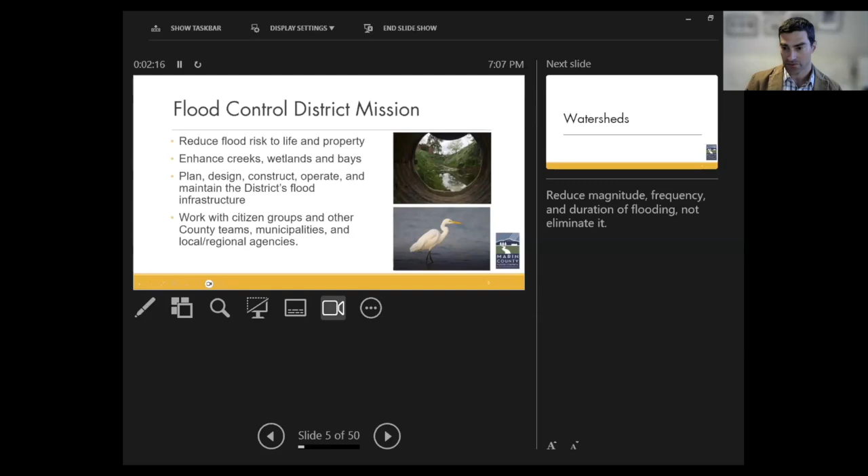In terms of watersheds in Southern Marin, there are 6 primary watersheds. Let me use the laser pointer here.

So we have Marin City watershed, Coyote Creek, Arroyo Corte Madera del Presidio, Ryan Creek, the Sutton Manor, Alto Strawberry watershed, and Bel Air.

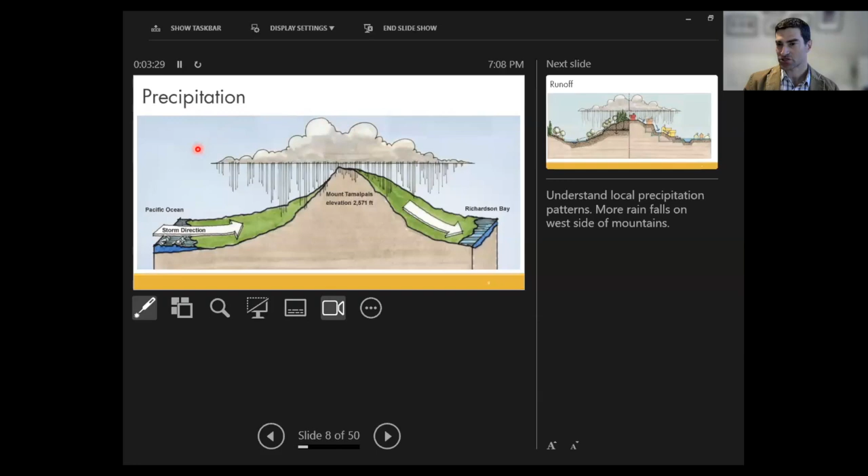So that's the terrain. In terms of precipitation, a lot of the rainfall patterns come to us from the Pacific Ocean. There's more rain that falls on the west side of Marin. It gets blocked by Mount Tamalpais, so there's less rainfall on the side that we're talking about today along Richardson Bay.

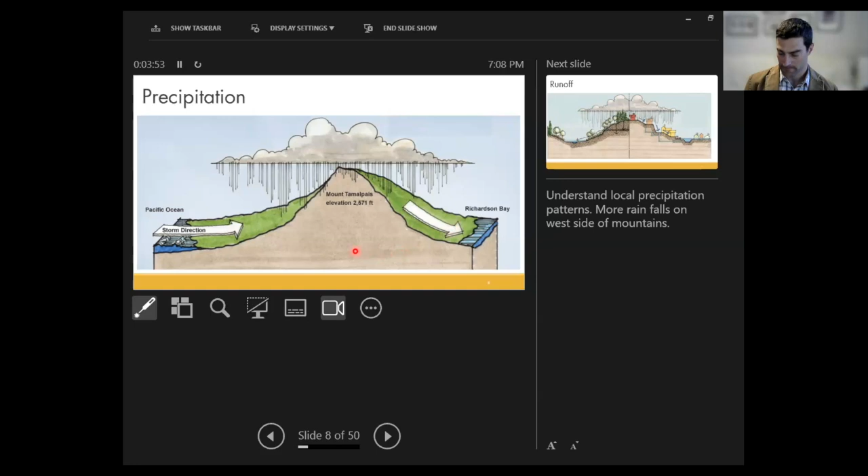The amount of runoff that goes to our storm drains and creek systems is increased or exacerbated when we add imperviousness — urbanization, rooftops, roadways, pavement. That water does not necessarily seep in or get collected, but runs off in higher magnitude and more frequently.

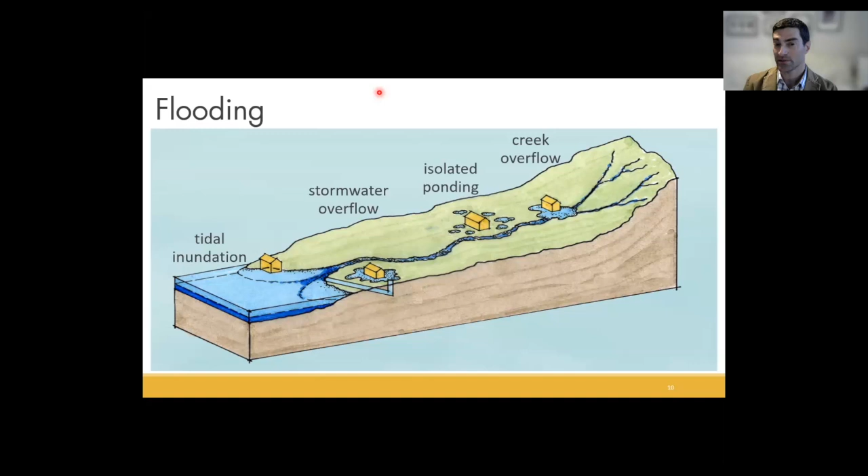In terms of flooding, there are different mechanisms. We have creek overflow, which is where creeks spill over the banks, shown here. We have isolated ponding, which is when pools form without positive drainage. Stormwater overflow is when storm drains back up, due to conveyance deficiencies or condition deficiencies.

Conveyance deficiency is when the pipe is just not large enough to convey the flow occurring during the storm. Condition deficiency is when the pipe is actually clogged with debris or sediment, and that can cause an overflow as well.

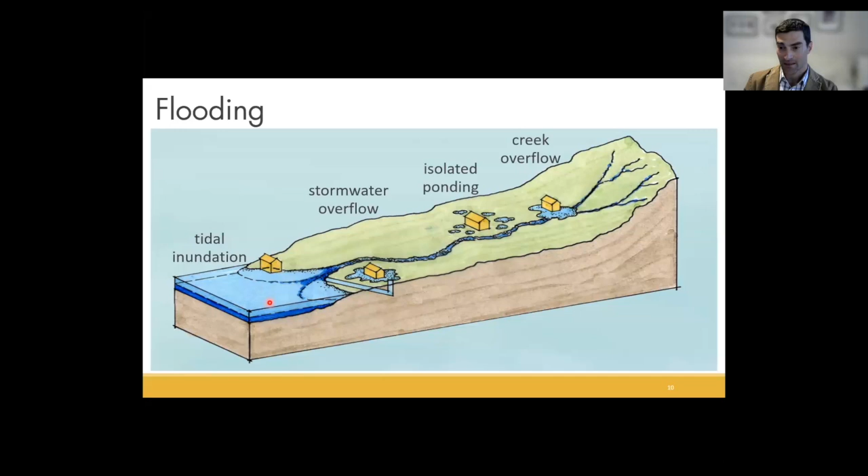Then also tidal inundation with rising tides can flood lowland areas. This is a big issue along the bay margins where there's development on top of young bay mud, which is fairly compressible. So in certain parts of Marin, we see inches to feet of differential settlement that has occurred over time, and when you're near the bay, that can really affect flooding.

So it is a challenge to address that, but there are things we can do, as Judd has said, and Andrew and Brian will tell you. There are things we can do to reduce the amount of flooding and the duration that it lasts.

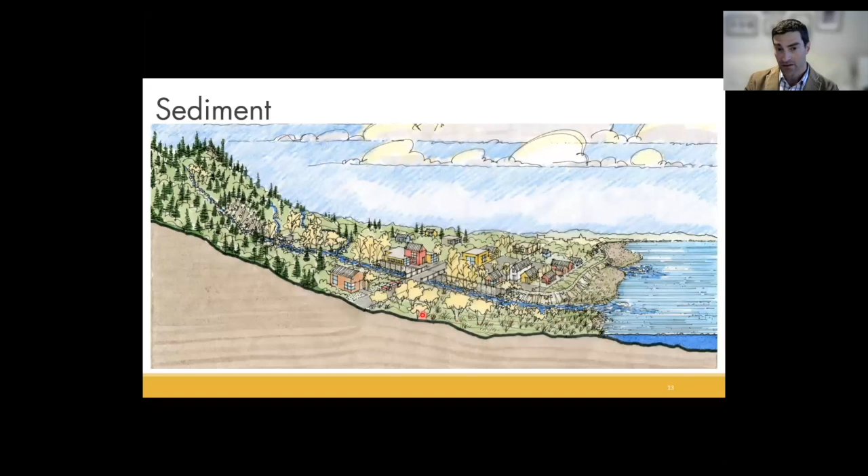As a geomorphologist, I think not only about water flow, but sediment as well. This is an artistic rendering of what I call a longitudinal profile of a creek, showing different zones of sediment. There's sediment production in the steep hillsides, where erosion supplies the creek with quite a bit of sediment. Then there's the zone of transport.

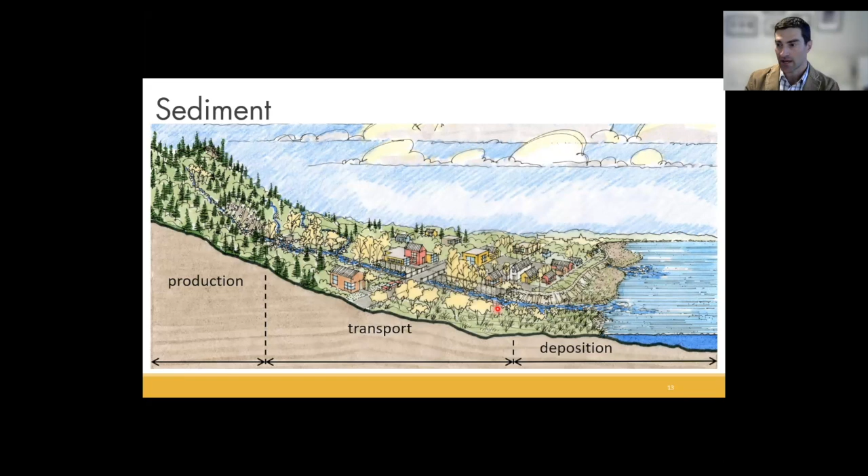That's where in our creeks, many of them are conveying that sediment supplied from above and along bank erosion, down through the system until we get to more of a depositional area. Those tend to be on the flats along the bay. Sediment deposition is an issue when it affects the ability to control for flooding. If there's enough sediment buildup, there could be a need to dredge or excavate that sediment.

So you may be asking yourself how you might be able to help. One is inspecting and clearing your driveway, culvert, and drainage is very important. I don't know if many of you know that pavement damage, soil erosion, and mudslides can actually be caused by blocked stormwater flow across driveways or under driveways through culverts. If leaves or other waste block the flow of stormwater runoff, the water gets redirected and can cause serious flooding or other localized erosion.

Those issues can lead to road closures and need for repair projects, and those repair projects cost money, paid for in many cases by county tax dollars. So you can help prevent such damage and costs to the public by doing simple things, including inspecting and clearing your drainages, reducing debris, and placing green waste in the compost. Do your part before the rain. The best time to do some cleaning is late summer, early fall, right before the wet season starts.

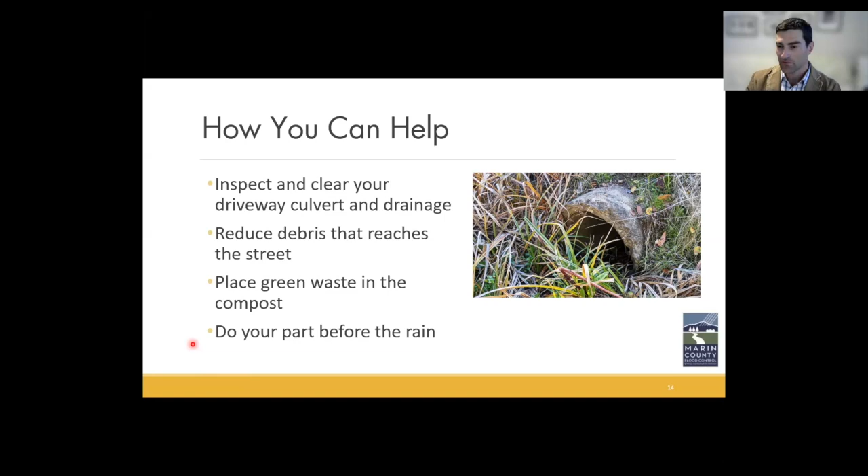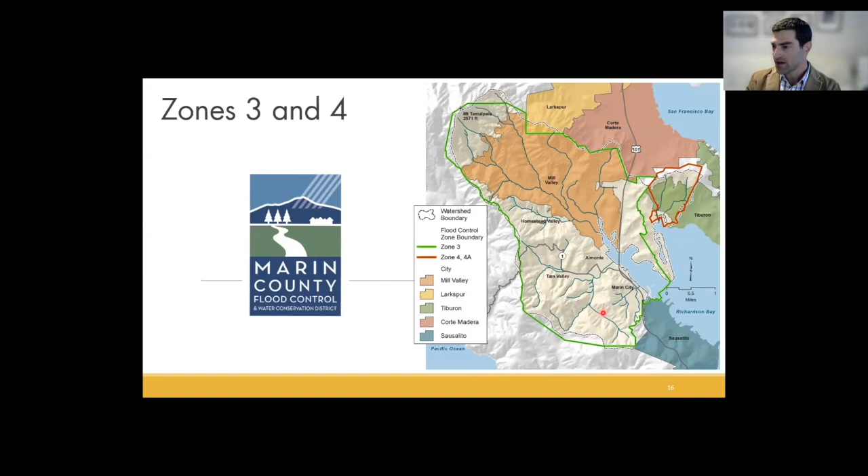Next, I'm going to talk about flood zones, how the flood district is organized in Southern Marin. You can see that we have flood zone 3, including Mill Valley, Tamalpais Valley, Marin City, and then we also have zone 4 in Tiburon.

Our different types of projects include maintenance projects, capital improvements, as well as planning studies. This is one example of a sediment debris basin in the Coyote Creek watershed, and it's an example of where this project had to be planned. It was in a planning document to begin with, so that's a study. Then it was built, and when it's built, that's a capital improvement. Following that, there's regular maintenance.

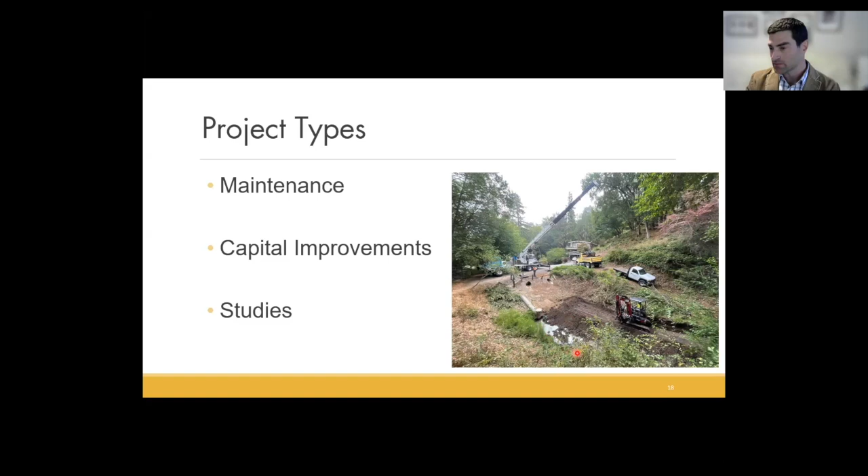This is a picture of some contractors cleaning out sediment that was built up in the debris basin. For maintenance, this gives you a little bit of the areas that the flood district concentrates on. We have a number of pump stations, 8 pump stations in zone 3 and 4, and we also have creeks and levees that we maintain. These are the names of the different pump stations.

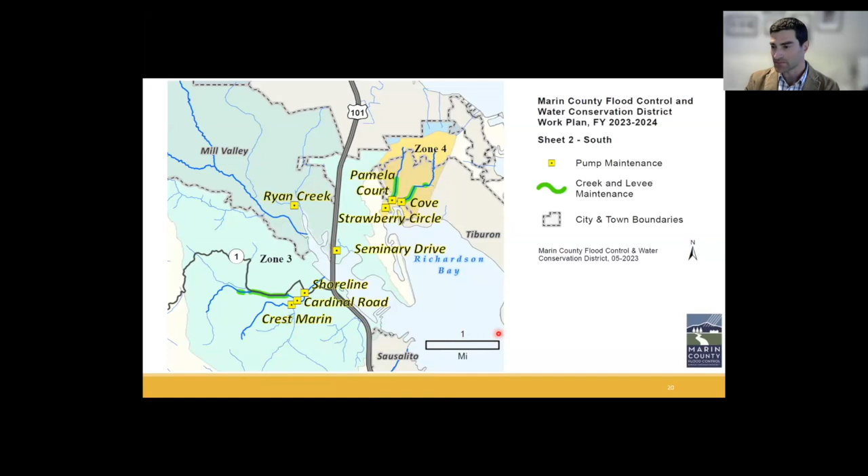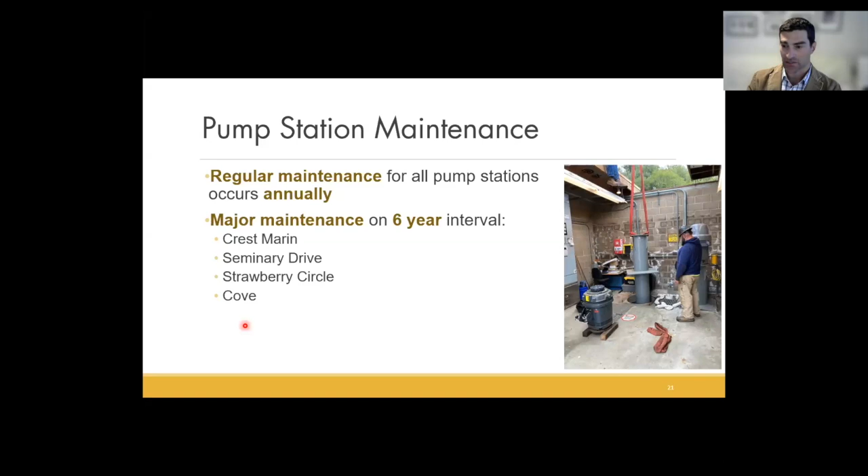For pump station maintenance, we have our regular maintenance for all pumps, which occurs annually. That regular maintenance includes inspection, testing of pumps and engines, as needed replacement of electrical and mechanical components and fuel, and then major maintenance on a 6-year interval. This coming summer, that will include one pump each at these 4 pump stations: Crest Marin, Seminary Drive, Strawberry Circle, and Cove. We try to do one at a time so that we don't have several pumps at one station out of commission at any one time.

For creek and levee maintenance, we have vegetation that overhangs the Coyote Creek concrete channel, which needs to be trimmed back for inspections of the concrete walls and tide gates every year. We have levees that are mowed in spring, and rodent burrows are filled twice in the summertime. Tide gates are maintained, repaired, and replaced as needed. Every other year, the U.S. Army Corps of Engineers completes an inspection of the Coyote Creek and related facilities. There's also sediment removal that's scheduled during the summer.

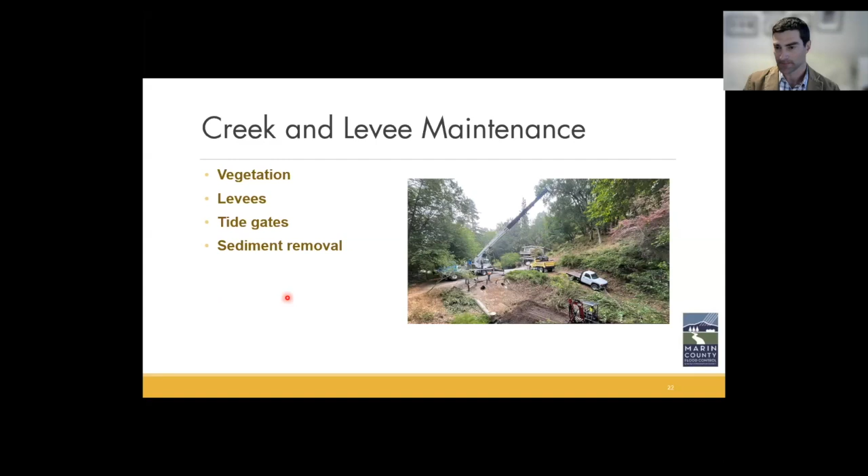This is just another map showing the Coyote Creek area that the district focuses a lot of its stream maintenance program on.

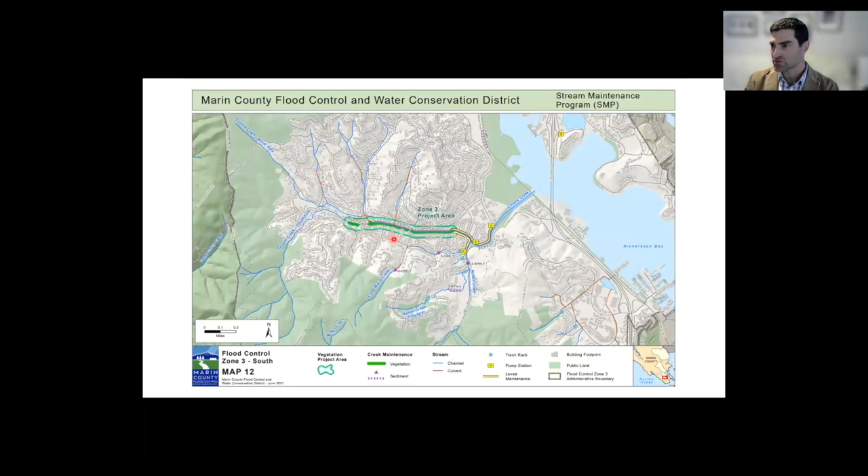So now on to capital improvements. We're going to list the different capital improvements we'll go through, and each one has its own slide. We'll talk with staff from the city of Mill Valley about what they're doing.

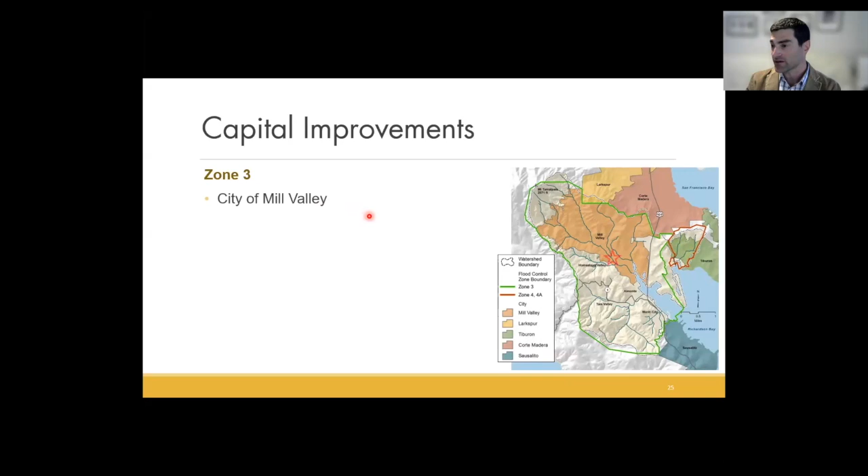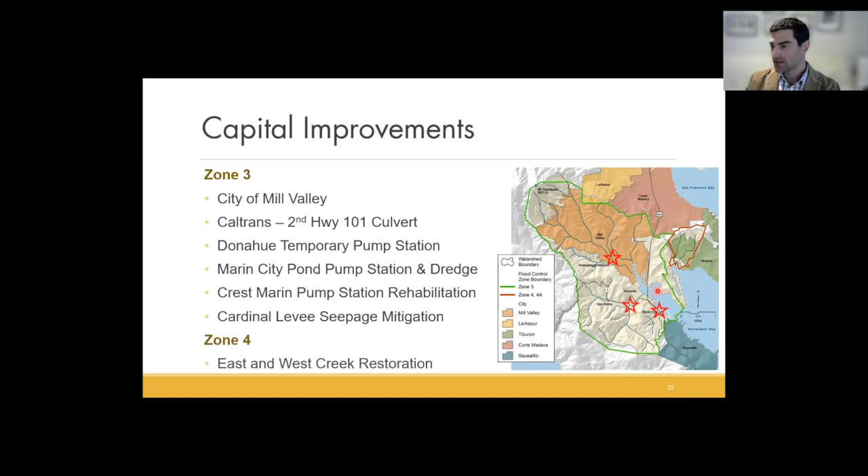We have 3 projects in Marin City, 2 in Tam Valley, and then 1 in Tiburon.

First off, for the City of Mill Valley, I want to hand it over to Andrew Poster, the Public Works Director at Mill Valley, and Brian de Guzman, a project manager. There was $3 million in flood risk reduction projects approved by Flood Zone 3 in September of 2024. This is really an example of municipality collaboration with the flood district to get important projects implemented. I'll hand it over to Andrew to talk about what they're doing.

All right, thanks Judd. Good evening everybody. I want to first thank Stephanie and the team for inviting Mill Valley to talk a little bit about what we have going on. Also, a fun fact about me that Robin didn't mention in our introduction about the Outdoor Art Club - I actually got married there a little over 28 years ago, so thank you for keeping that facility up. I love walking past it every day, so it's very cool.

Very special to me. So I wasn't exactly sure where we were going to fit in on the slides, so I just got a little overview, just a couple minutes. In the city of Mill Valley, where it really started to get pretty hot and heavy for me was about 8 years ago.

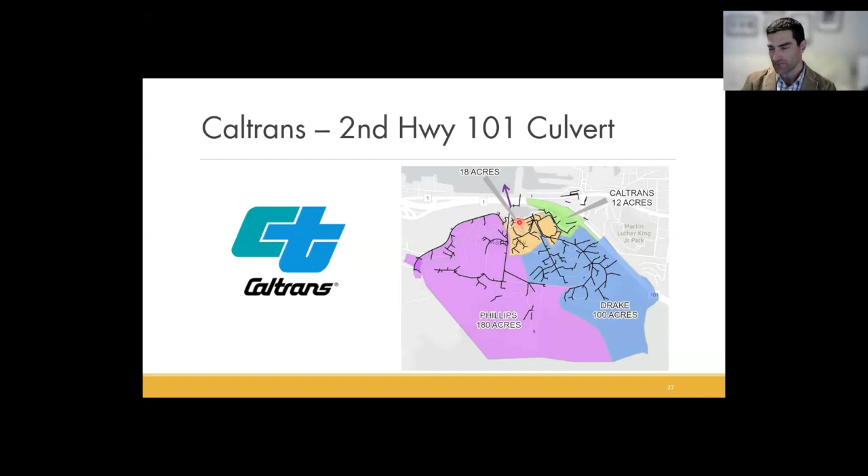What this project would do is split the flow so that we have another means of getting runoff across Highway 101 to the bay. The Phillips watershed would have its own designated outfall. This really helps with conveyance of water during a peak storm and getting water out. It avoids what's currently kind of a log jam of water into one box culvert, allowing for water to be much more readily gotten out of Marin City.

The next one is a flood district project, completed in fall 2024: the Donahue Temporary Pump Station. You can see it from the intersection of Drake and Donahue, just outside the Gateway Shopping Mall. This project is to reduce the duration of flooding. It includes portable pumps and allows for improvement of the entrance and exit into and out of Marin City.

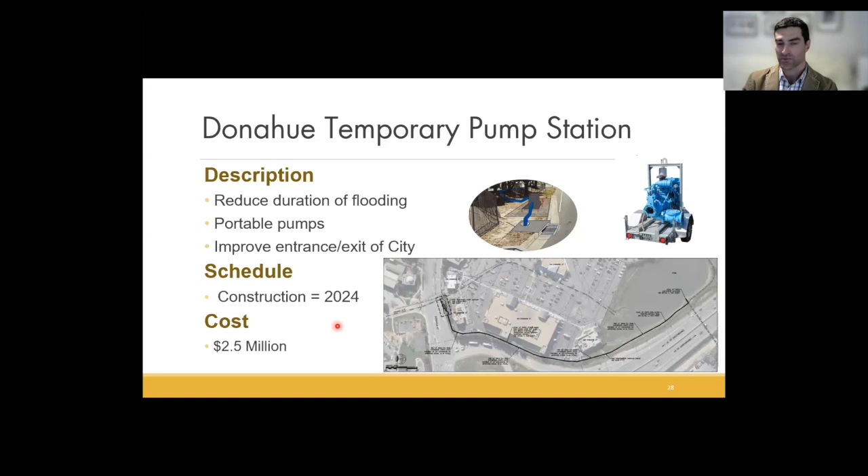As I'll talk about later with the Marin City Stormwater Plan, the Drake and Donahue intersection, as well as the off-ramp and on-ramp for the Highway 101 southbound lanes, can get flooded during high tides and heavy rainstorms, relatively frequently. This is a means to help control that until we can get a more permanent pump station in place. This was built, it's operational, and it's been functioning as intended.

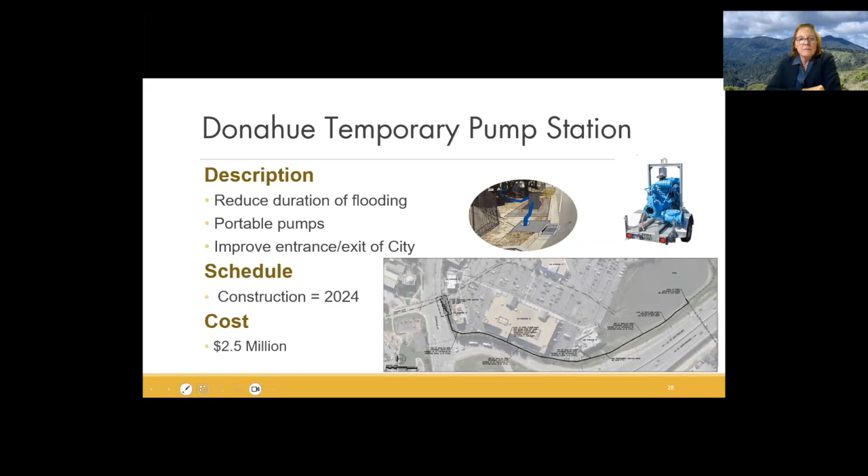If I might, Judd, it's been functioning very well, and everyone should know the Drake Donahue underpass typically floods often during the winter. Thanks to this temporary pump, for the first time that underpass has remained open even in our heavy winter rains. That's really quite a remarkable thing for that community, they have not had that before. So thanks to our team.

Next is more of the permanent solution for a pump station in Marin City. As I showed in the prior watershed diagram, the outlet is the existing box culvert under Highway 101. So this would be a new pump station to be able to send water that collects in the pond out to the bay, even when there's high tides.

Typically when there's high tides, we need to shut a slide gate during high tide so that we don't have inundation in roadways within Marin City, even on a dry day. So you can imagine when there's rain on a high tide, having the capability of a pump station to draw down the pond and alleviate the flooding and backwaters on the streets of Marin City is really helpful.

Planned construction is 2028 or 29. We're currently in the midst of a grant application for the FEMA BRIC program, and we're responding to requests for information during that.

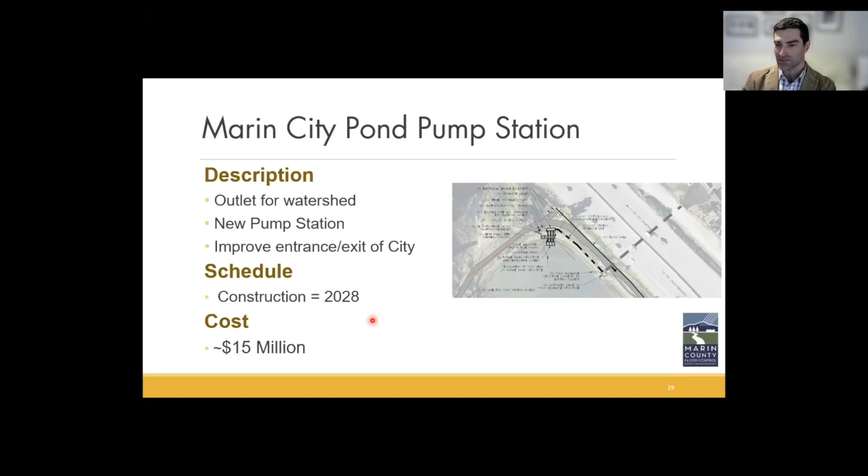This is another side view of it, and I have a little animation to share. So this is the pond here. There'll be a new outlet for the pond, a new flood wall along here in order to reduce flooding on the shoulder of Highway 101 South.

And this is the pump station itself. Next Tuesday, we're going to have an event to kick off a process for how to beautify this pump station. You can see that it's quite a canvas for some artwork, local artists to contribute to beautifying it, rather than it creating an eyesore. It can be an amenity for the community.

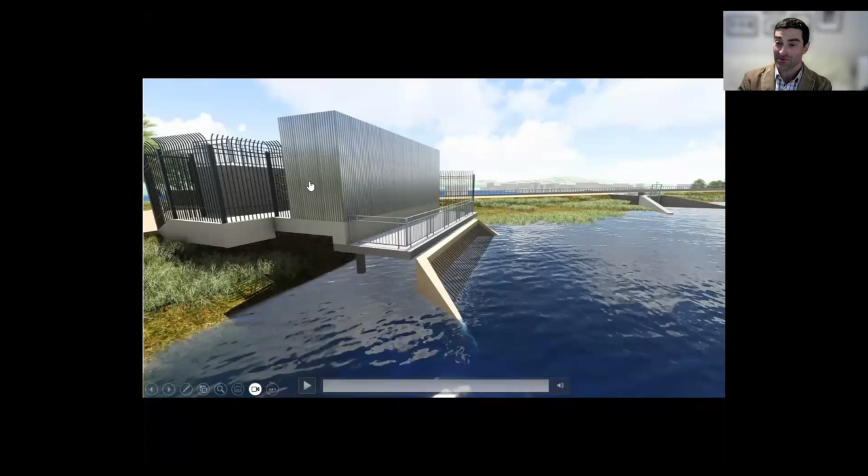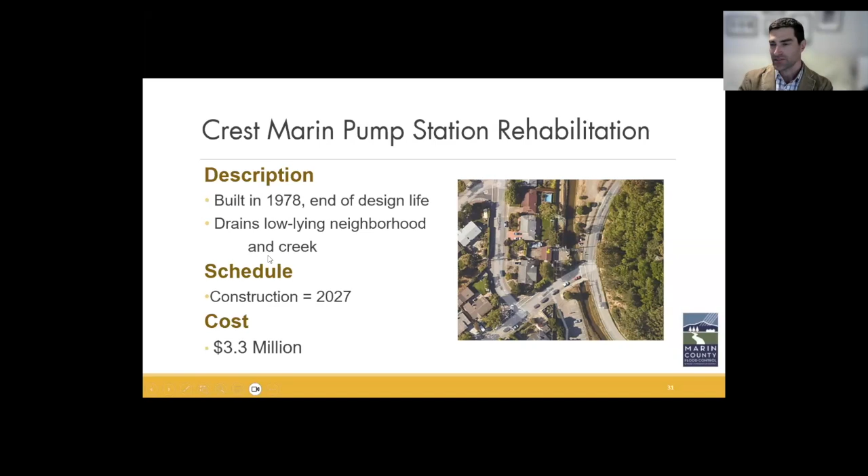Next is in Tam Valley, Crest Marin Pump Station rehabilitation. The pump station was built in 1978, so it's reaching the end of its design life. It drains low-lying neighborhoods and a creek, so there needs to be a pretty major rehabilitation associated with it. We're looking at constructing in 2027, and we're currently in the early stages of design for this project.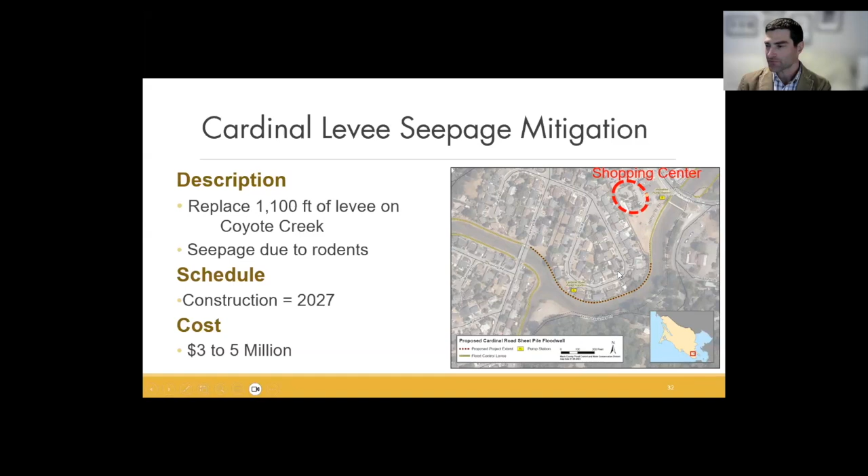There is a possibility of doing some planning as part of this contract in order to see how tide gates could possibly function on these creek systems in order to better protect Tiburon Boulevard, which, like Marin City, can be impacted during high tides.

Yeah, if I might, I'd like to give a shout out to the members of the Flood Zone 4 board who are here tonight with us. Good to have you, as well as Flood Zone 3. But I know Flood Zone 4 has been eagerly awaiting work on East and West Creek.

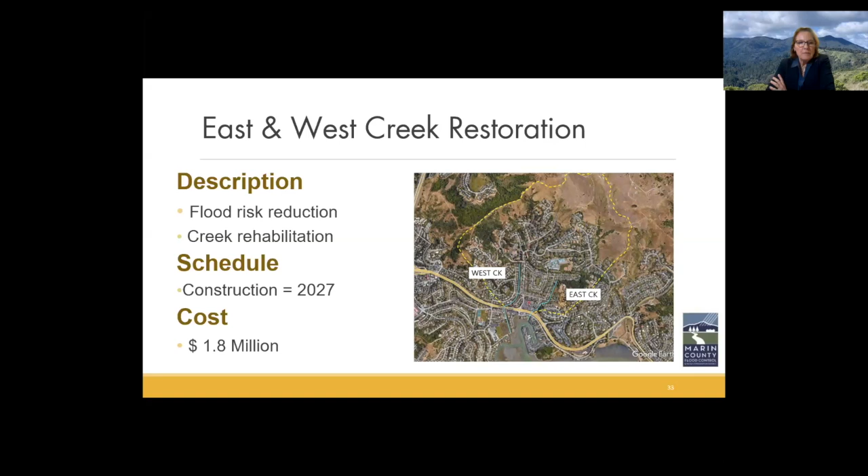And so if you could say a little more, Judd, are we in the design phase right now, or what stage are we in so that we go to construction in 2027? We are in the process of the request for qualifications being publicized. We have a good number of consulting firms that do this type of design work who are interested. We had a pre-bid meeting just last week, and we're looking at selection in early April for the design contract. Thank you, and we'll be out to Flood Zone 4 in April as well. Great.

And now, planning level studies. I'm going to really highlight the Marin City Stormwater Plan.

So the purpose of this project is really to identify projects to protect public access during floods, and recommend and prioritize improvements. A key piece of this is reducing flood risk, not only as a technical study, but with community input. The community was essential in terms of providing survey responses on their values for 9 different criteria or objectives of the plan.

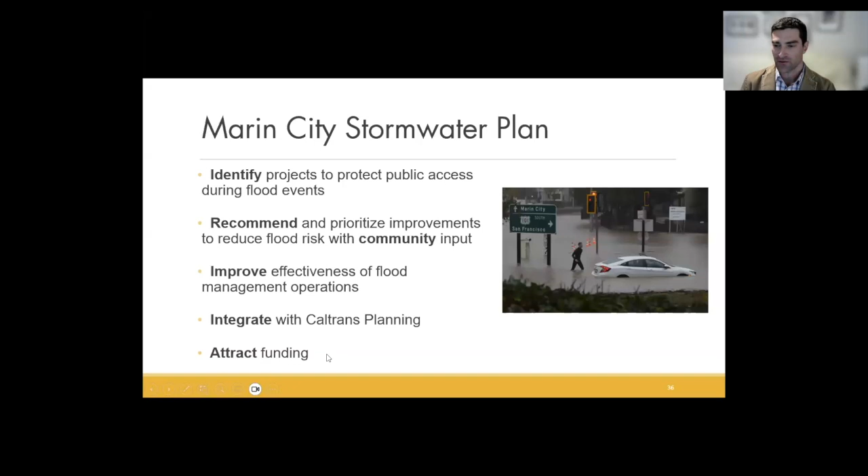We were able to incorporate that into the scoring of our alternatives. The plan also aims to improve effectiveness of flood management operations, integrate with Caltrans, and attract funding for recommended projects. The different improvement types are geared towards different issues.

One is maintenance. Sediment and debris can get into our storm drain systems. Part of the watershed is very steep on the hillsides, and they drain to the lower watershed, which is flat and flood prone. That's where a lot of sediment and debris can settle out and clog our storm drains, so we need to maintain those and repair the ones that are broken.

In some cases, we're looking at increasing the size of storm drain pipes or adding pumping capacity in order to convey the water more readily. This is a naturally flood-prone area. We also need to stabilize sediment higher up in the watershed so it doesn't end up clogging the storm drains, similar to what we see here. Landslides and erosion can actually turn into clogging issues downstream.

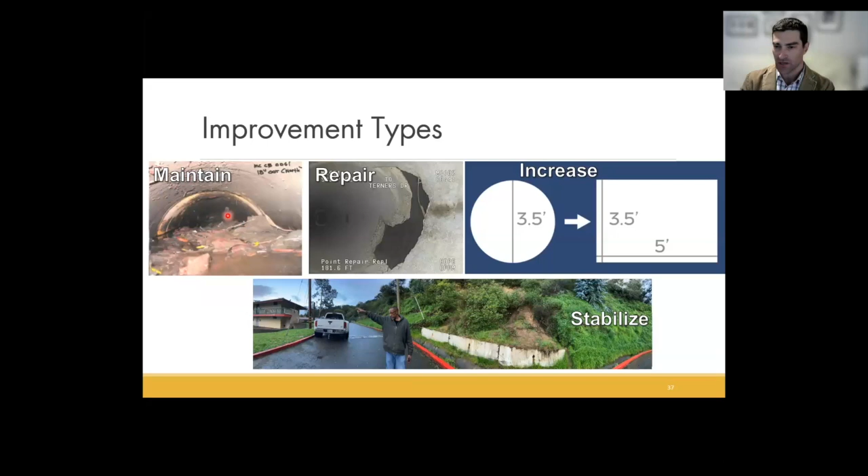This gives some of the recommendations. One is the Phillips Drive bypass to the New Bay outfall—this looks familiar, that's the second culvert. That project is underway with Caltrans.

Also, the Drake pipe upsize, increasing inlets along Drake to get more water in with more drop inlets from the street surface, into the storm drain pipe under the street, and then being able to convey it. This is a project that a lot of other projects rely on to get flow down to where it needs to go.

And then, as more of a sea level rise adaptation project when needed, we're considering a partial bypass to the New Bay outfall, which could or could not include some storage in the traffic area, the cloverleaf, as well as pumping. I want to add that the temporary Donahue pumps—that infrastructure that was built—could actually be utilized to help implement this other project.

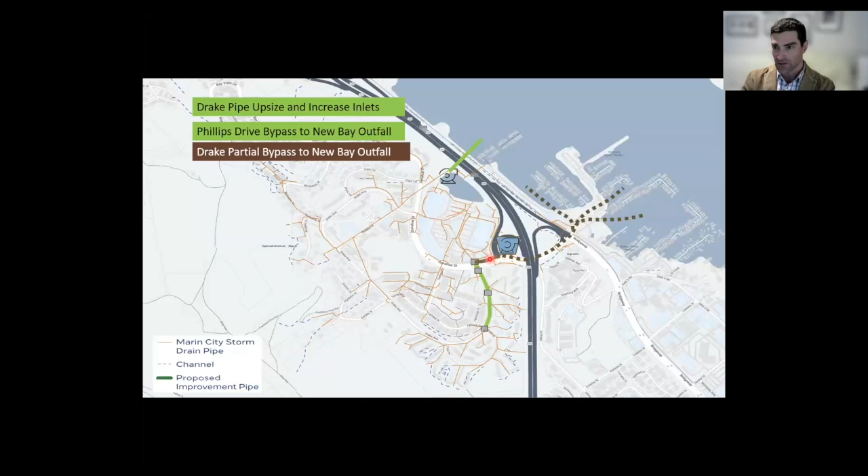There are also improvements further up in the watershed, meant to control sediment and debris from getting into our storm drain system. So you'll see a lot of trash racks and sediment basins, increasing inlet capacities, repairing landslides, and connecting hillside pipes to alleviate mud flows and debris flows that have happened. In other cases we just need to increase inlet capacity to get more water in, and stabilize some of the hillside trails with simple best management practices to control erosion and sediment coming off those steep hillsides.

Overall, what we're looking at: this is the existing condition, where the magenta color shows deeper flood depth for this particular event. You'll see the shoulder of Highway 101 getting flooded in the existing condition, as well as the off-ramp and the Drake and Donahue intersections. Once we include our baseline projects—the pump station, flood wall, and a short segment in the Gateway Mall of replacing and upsizing pipe—that in itself will really improve things, we feel, in terms of being able to get through Marin City, in and out, during a storm event.

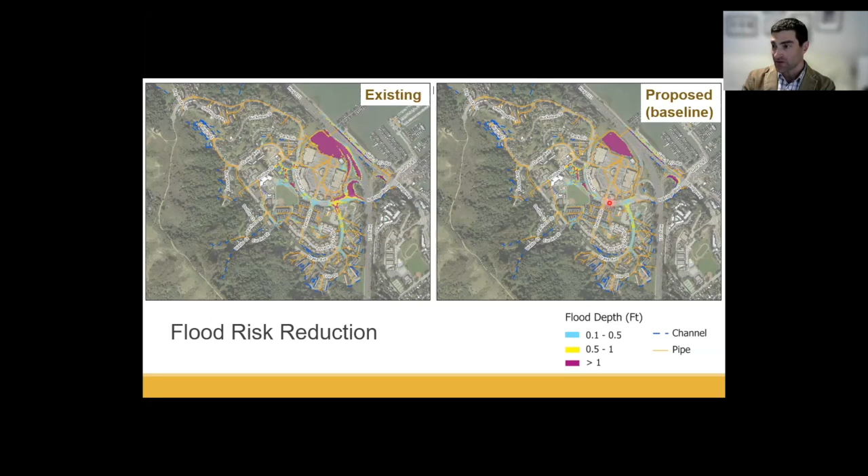And the additional projects will only make it better than that.

Community communication has been crucial as part of this. I do want to highlight that this coming Tuesday, March 25th at 5:30, there will be the third and final community meeting for the Marin City Stormwater Plan. It's at the Marin City Arts and Culture Studio at the Gateway Shopping Mall, and it's open to the public—you're welcome to join.

And Stephanie, did you want to speak here?

In wrapping up, I just want to say how important community communication is. People who live in these areas are the ones who know the most about the flood patterns, so we have our meeting in Marin City. I know Andrew mentioned a walkabout in the Sycamore community, which is important, and then we'll have our Flood Zone 4 meeting later in April. So, all very important—partnership between the city, the county, and our communities. Thank you.

Hey, am I back on? Can't quite tell, we see you. I see me, but I'm not full screen, but I guess that doesn't matter.

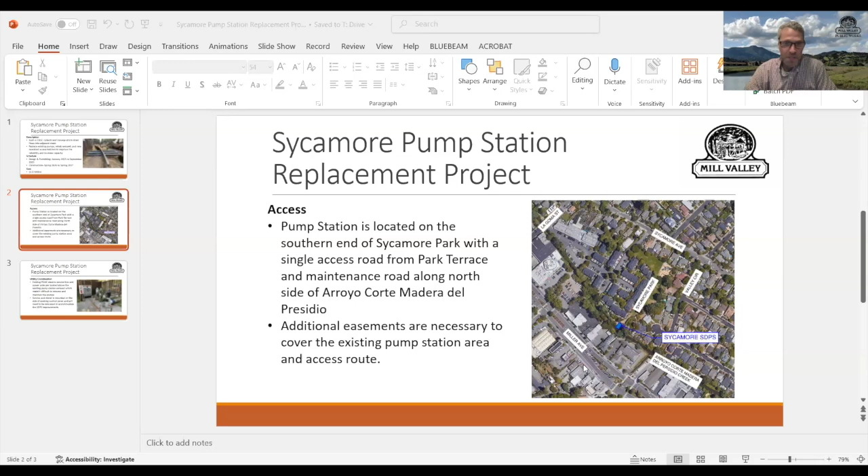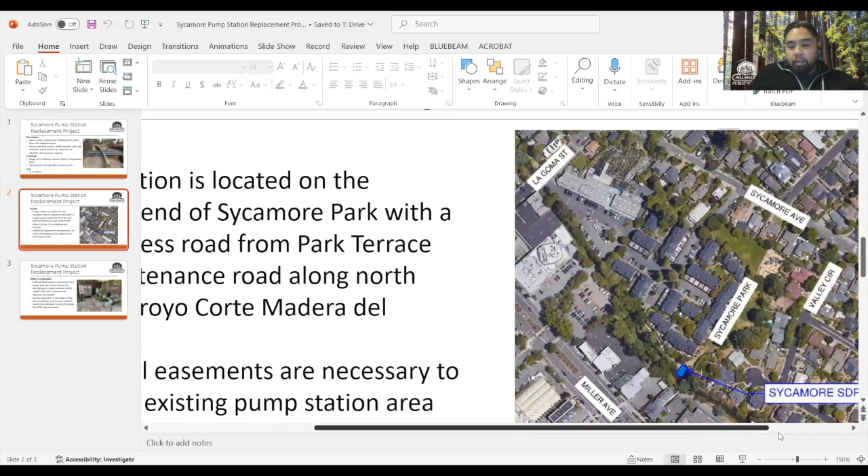There we go, here we are. Sorry about that. So if you could see here, we have the Arroyo Corte Madera del Presidio alongside here, Valley Circle - you're probably going to need to zoom in, Brian, at least on my screen. So here, this little blue circle, I'm sorry if it's quite small, I'll try to zoom in as much as I can. But Arroyo Corte Madera del Presidio is here.

Valley Circle, this is Sycamore Park. It's on the south end of Sycamore Park. It's actually in the backyard of one of the property owners, and a storm drain easement runs along there, just north of this. So it's tucked behind here quite a ways away, not very visible. There is a fence enclosure so you can't really see it - it just looks like a fence to a backyard. But there are three pipes that jump out of that fence and pump straight into the creek there. So that's where it's located.

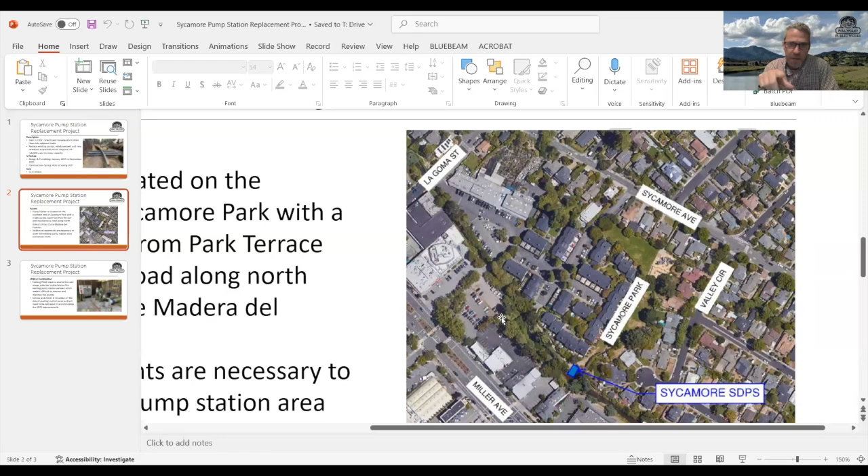I think you have a picture of that too, Brian. It's tucked in there - that's Park Terrace, a homeowners association, a condo complex that the city has an easement to go through to get to it. One of the real challenges is those pipes that are discharging the pumped water are often underwater themselves when the creek rises. There really isn't an easy solution for these.

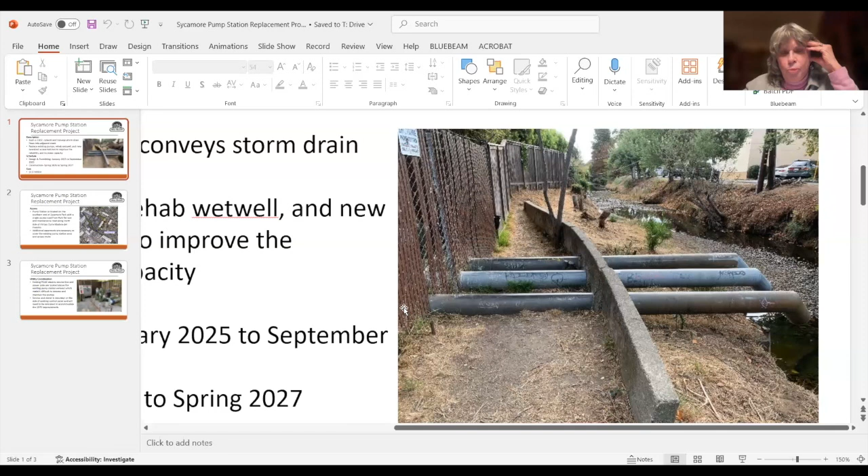On that night, those pumps were not working, right? There are 3 pumps - one of the 3 pumps was working, the other 2 had electrical issues. Here's the 3 pumps. We were looking to upgrade and replace these pumps, as well as the electrical components, to hopefully make them more reliable during those situations.

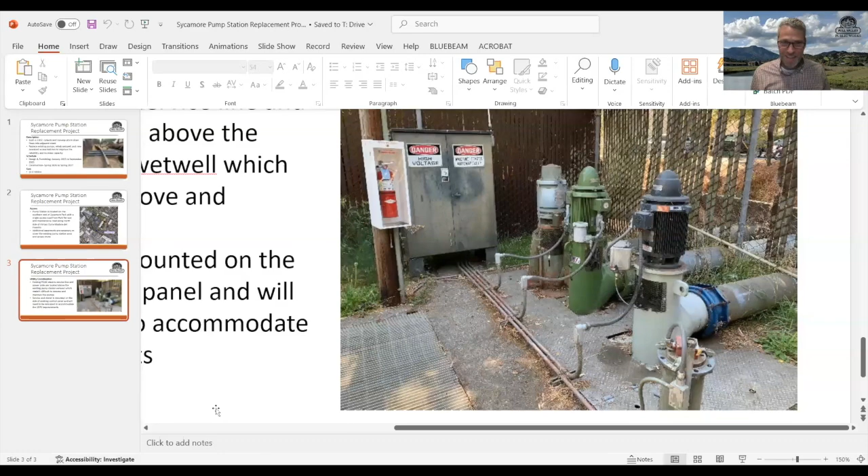Thank you very much. Andrew, where is your Thursday morning walkabout in Sycamore? Thank you for reminding me - I didn't know if I should jump in with that. I've looked at my calendar since then. We start Thursday at 8 a.m., and as of right now, the latest information I have is it's Sycamore Park. I don't know if that means we're meeting at the entrance or at the back of the park, but that's the information I have. Okay, that's excellent to know, I'll be there.

Okay, are we getting ready to end? What time does it say we have? We're almost at 8 o'clock. Erin, do you want to jump in here, or Robin, or should we just end it? There's no more questions that I can come up with that haven't been answered.

Wait a minute, there is one more at 7:55. Judd, will you consider attending the FZ4 meeting in late April to discuss Greenwood Cove flooding and backflowing seawater into the Bel Air apartment neighborhood? I will be there, looking forward to it. Oh, he'll be there, okay.